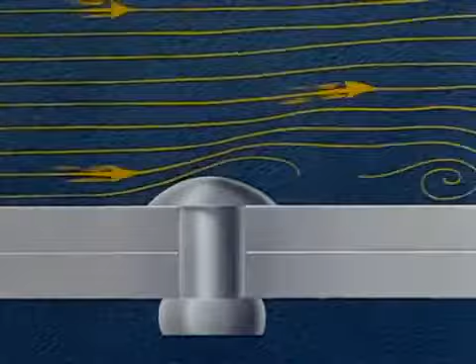With the ever-increasing demand for greater speeds in aircraft, it has been necessary to remove every possible projection from the outer surface of the airplane. Everything that would induce turbulence with its attendant drag must be reduced to a minimum. The use of a rivet, whose head is flush with the surface being riveted, eliminates the drag of the ordinary rivet head and thus aids in accomplishing our higher speeds.

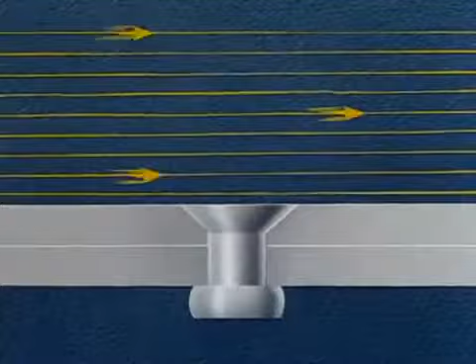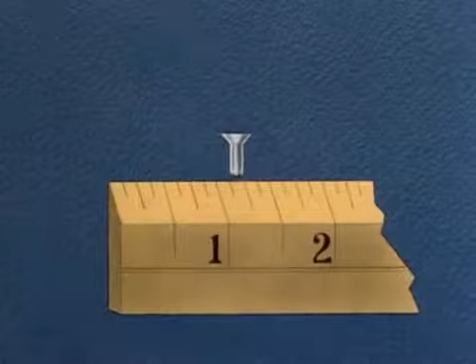The choice of method to be used in flush riveting is based on the thickness of the sheet next to the manufactured head. Let's assume we're driving a rivet 1/8 inch in diameter with a 100-degree countersunk head. Probably the best production method involves sheets of 40 thousandths thickness or greater.

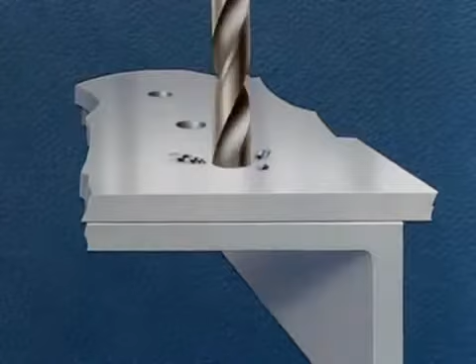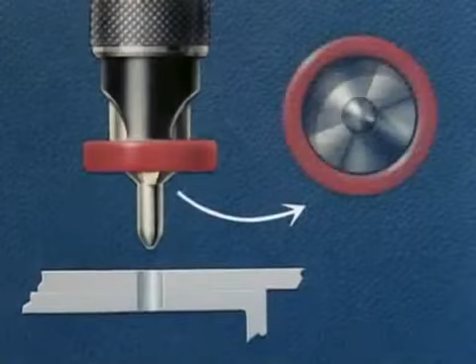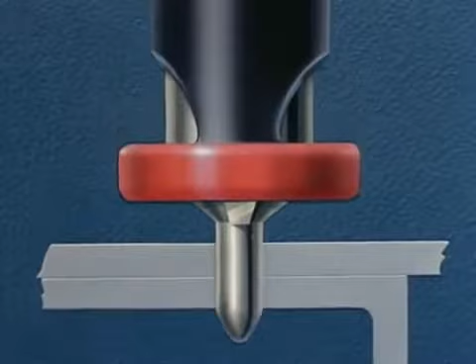We start with the assembly of the sheets, drilling the correct size hole for the given rivet. We're using a 1/8 inch rivet, so we drill a number 30 hole, then countersink, using a special countersinking tool with a 2-flute cutter and with a 100-degree cutting angle and number 30 pilot. Unless specific approval has been obtained from the stress engineer, the countersinking should not go through the first sheet.

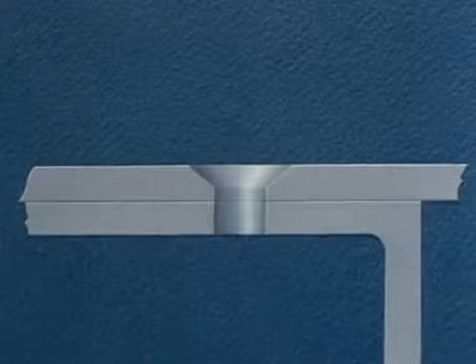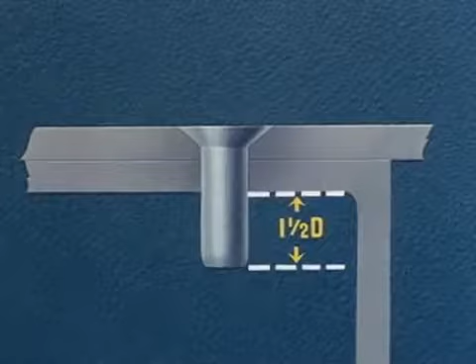If sheets are properly clamped during countersinking, it is not necessary to disassemble them for burring, which is a costly operation. Next, we insert the rivet, the length of which has been determined by adding 1 1/2 times the diameter of the rivet to the grip. The grip, as shown here in white, is equal to the total thickness of the material being riveted.

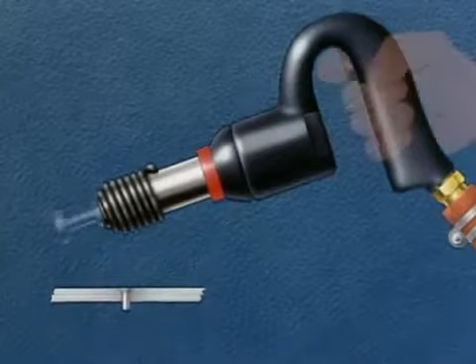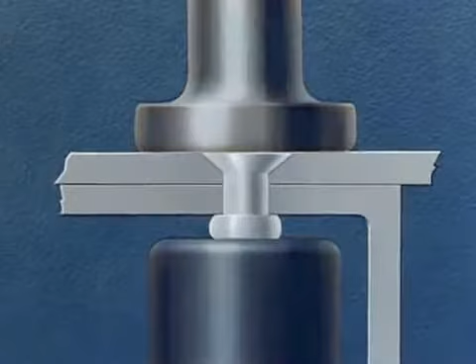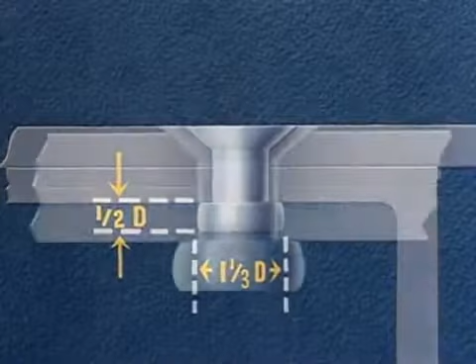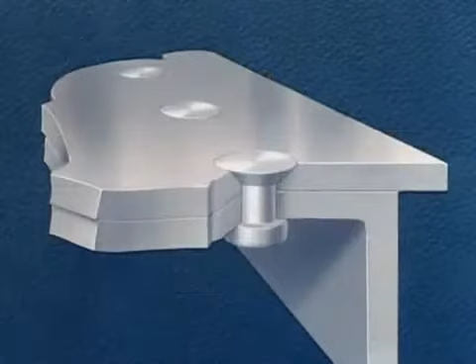A vibrating type air gun with a flush rivet set and a regular bucking bar may be used. Ordinary riveting technique will do for driving of this type rivet. The finished rivet should have a formed head, 1 1/3 times the diameter of the rivet and about 1/2 the diameter high. The flushness of the rivet, as determined by aerodynamics, must run in the neighborhood of plus or minus 2 thousandths. We have just demonstrated the countersink method of riveting. This is a method used when both sheets are over 40 thousandths in thickness.

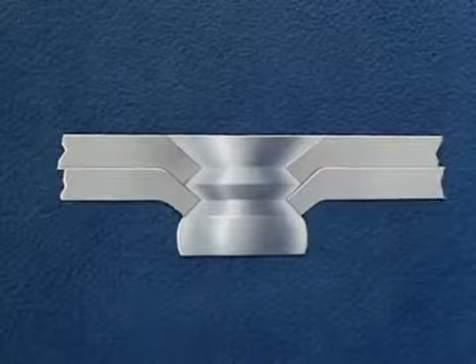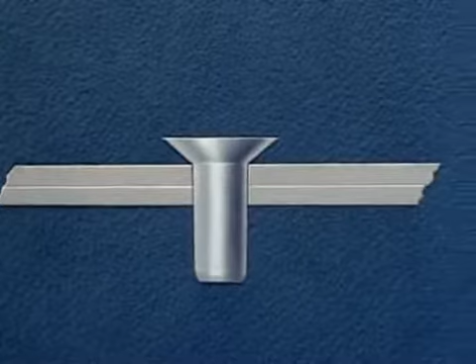Structural requirements make it necessary to dimple the sheet next to the manufactured head if this sheet is under 40 thousandths in thickness. This double dimple method is used for flush riveting thin sheets. Here again, we start with the number 30 hole and follow this with insertion of the rivet. The length of the rivet is again the thickness of the material plus 1 1/2 times the rivet's diameter.

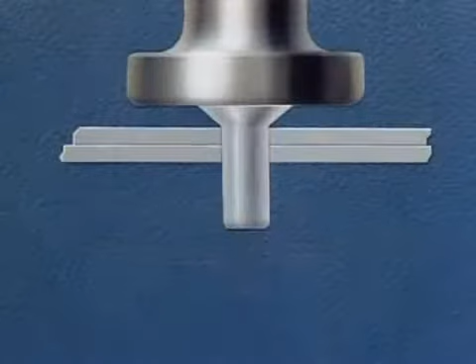The driver uses a standard flush rivet set. The bucker uses a special dimpling set that has been adjusted by the tool department to give the correct angle and depth of the dimple. Using the rivet as a punch, we dimple the two sheets together into the dimpling set. The special dimpling set is removed.

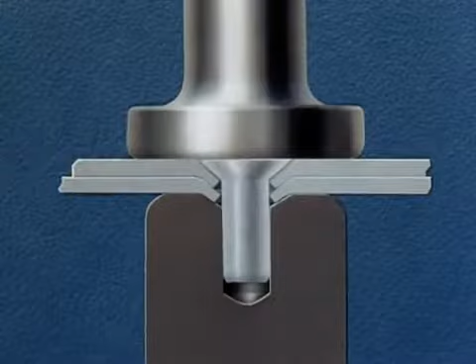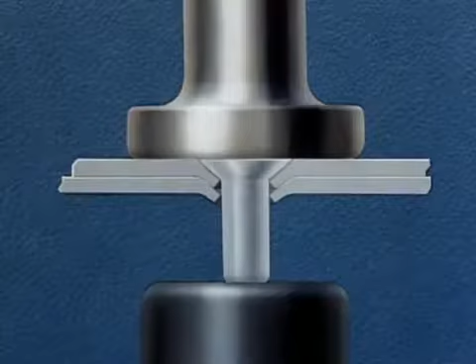The driver retains the standard flush driving set. The work then proceeds with the bucker using an ordinary bucking bar. Driving this type of rivet requires greater skill than was required in the previous method. Any clinching or offset of the rivet will cause the dimpled edge to crack. The rivet must be driven straight.

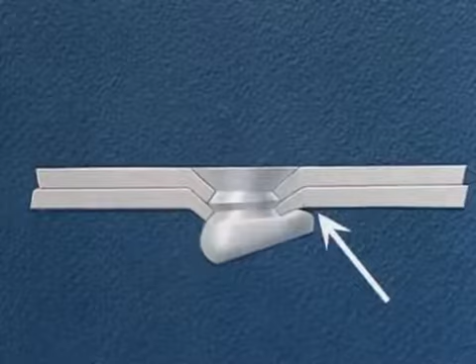We have just shown the double dimple method of riveting. This is one of the methods used when both sheets total 40 thousandths or less in thickness.

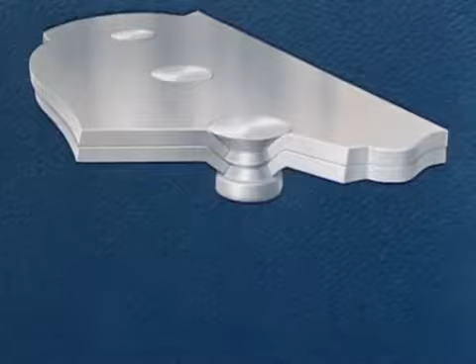A third method, used for riveting of slightly heavier gauges than in the last method, involves a separate dimpling of the sheets. Again, we start by drilling our number 30 hole. The sheets are then disassembled and machine dimpled separately on the squeezer. Note the angle of the dimpling tools.

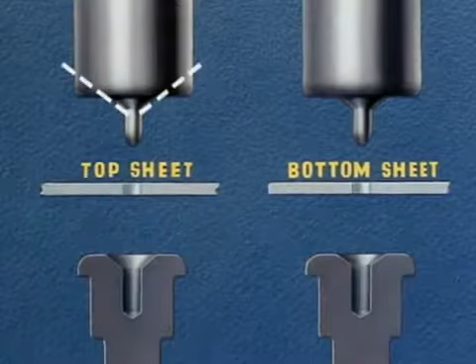The dimpling punch for the top sheet has an angle of 100 degrees, the same as the rivet head. The dimpling die has an angle of 110 degrees. The dimpling punch for the bottom sheet is also 110 degrees to correspond with the top sheet, and the dimpling die is 120 degrees. This difference is necessary in order to get a good nesting of parts.

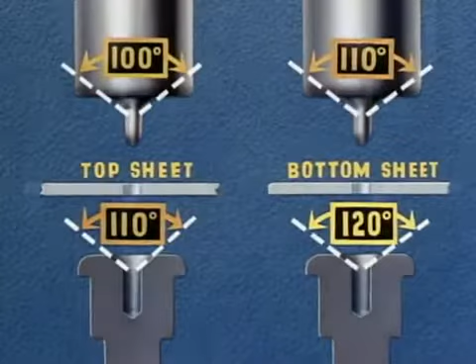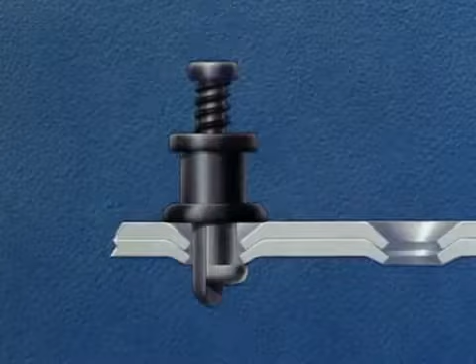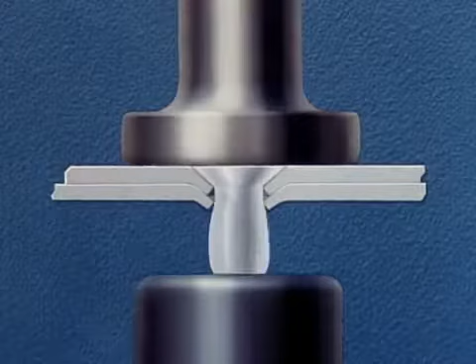Upon completion of the dimpling operation, the parts are reassembled. Sheet metal riveting clamps are used to hold the parts together until riveting is completed. The rivet is inserted, and from here on the work proceeds using a regular flush riveting set and the ordinary bucking bar. Driving this type of rivet requires the same skill on the part of the operator as in the former dimpled method. It is very important that the rivet be driven straight.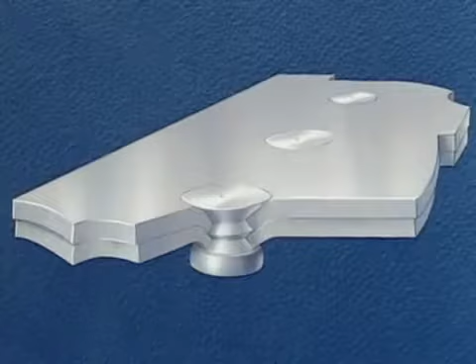We have just illustrated the pre-dimple method of riveting. The sheets were taken apart and machine dimpled separately on the squeezer. This is a method used when the sheets are too heavy for the double dimple process.

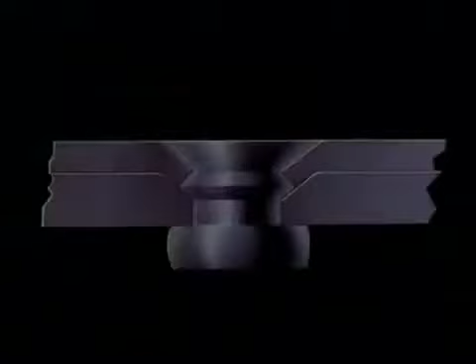For sheet gauges where the top sheet is too thin to countersink and the bottom sheet too thick to dimple, we must use a combination of pre-dimpling and countersinking. The top sheet, being under 40 thousandths, must be dimpled. The bottom sheet, being over 40 thousandths, will be countersunk. Again, we start by drilling a number 30 hole.

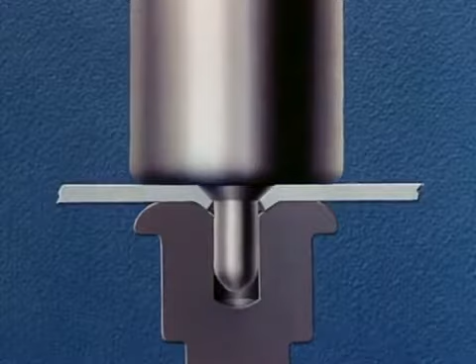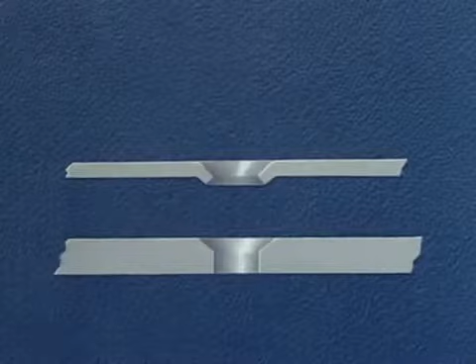Sheets are disassembled and the upper sheet is machine dimpled using special dimpling tools on a squeezer-type machine. The bottom sheet is countersunk using the special countersinking tool. The angles of the dimple and countersink are very important. The angle of the dimple next to the rivet must be 100 degrees because the rivet head is 100 degrees. The angle on the opposite side of the sheet is 110 degrees. The angle of the countersink is also 110 degrees.

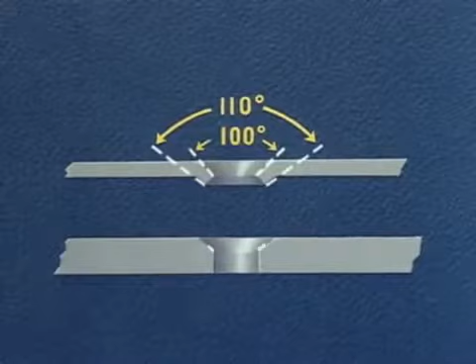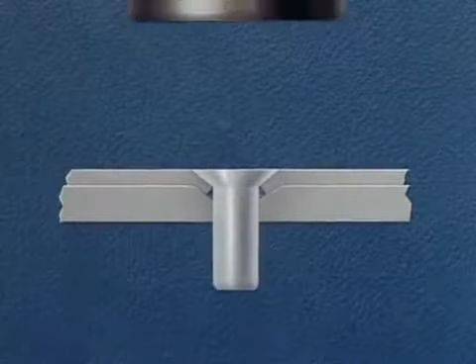Parts are reassembled using sheet metal clamps. Rivet is inserted. This is followed by driving the rivet using a standard flush driving set and bucking bar. This riveting technique is fairly simple because there is no lip on the under sheet to cause cracking or failure from clincher rivets.

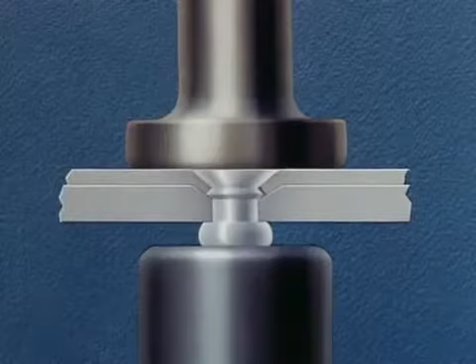We have just demonstrated the combined countersink and dimple method of flush riveting. This combination is used in cases where the sheet next to the rivet's manufactured head is too thin to be countersunk and the bottom sheet is too thick to be dimpled.

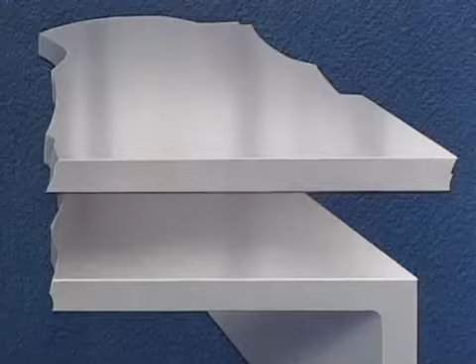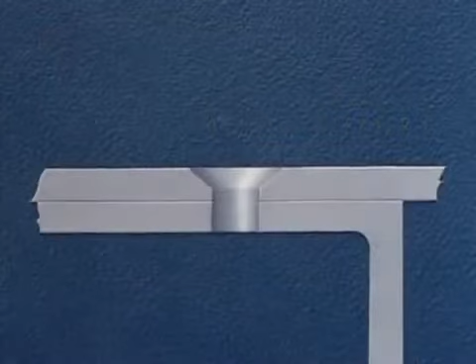Now let's review the four methods of flush riveting just demonstrated. Countersinking, used when the top sheet is 40 thousandths thickness or greater. The flushness of the rivet is obtained by setting it into a hole countersunk by a special tool. Double dimpling, used when the total thickness of the sheets being riveted is 40 thousandths or less. In this method, the flushness of the rivet is obtained by using the rivet itself as the punch to form the dimple.

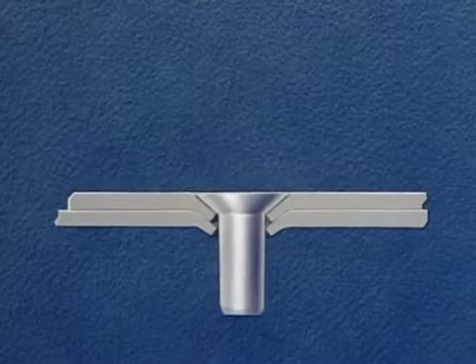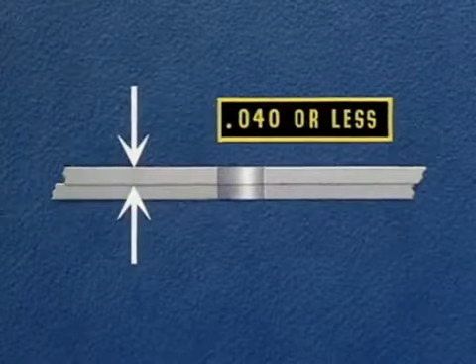Pre-dimpling, used when the top sheet is 40 thousandths or less, and the total thickness of both sheets is over 40 thousandths and under 90 thousandths. The flushness of the rivet is obtained by setting it into a dimple formed mechanically on a squeezer. Combination, countersinking, and dimpling, used when the top sheet is too thin to countersink and the bottom sheet is too thick to dimple. The top sheet is dimpled and the bottom sheet is countersunk.

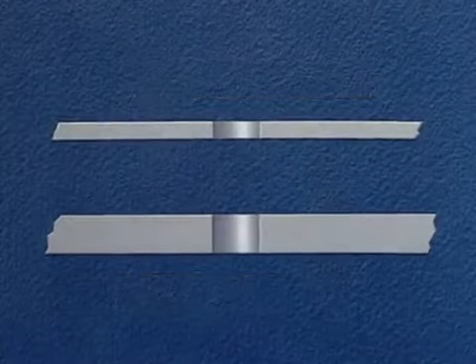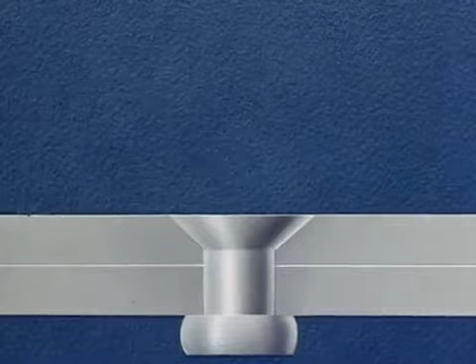The result obtained by each of these different methods is the same. The head of the rivet is flush with the surface so that the turbulence or drag is held to a minimum.